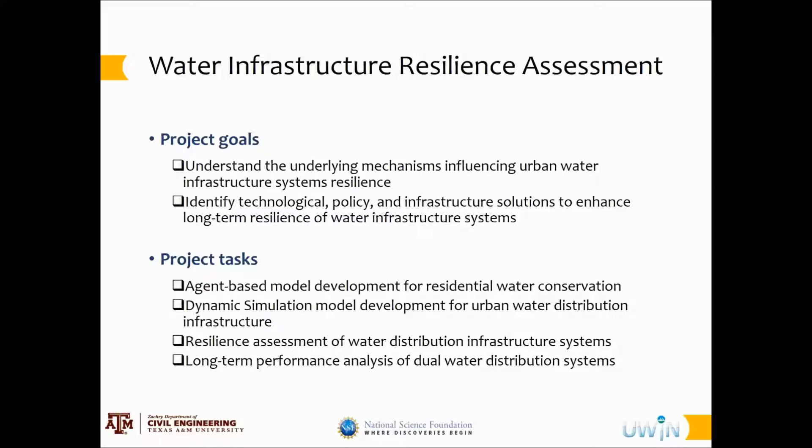So, in terms of the project tasks, we are looking into development of solutions on both the demand and supply side. On the demand side, we look into development of agent-based models to understand the behaviors of water consumers in terms of technology adoption for water conservation. And on the supply side, we look into the dynamics of infrastructure, water infrastructure resilience, especially water distribution networks, and look into their resiliency.

Just an overview of our research project: we have looked into development of an agent-based model for modeling the household behavior in terms of adoption of water conservation technologies, established a dynamic model for simulating the long-term performance of water distribution systems, and then looking into dual and singular water distribution systems, especially dual systems as an innovative infrastructure solution for improving sustainability and resiliency measures. Finally, we conduct scenario analysis to understand under what scenarios what solutions would be more robust and lead to better resilience performance.

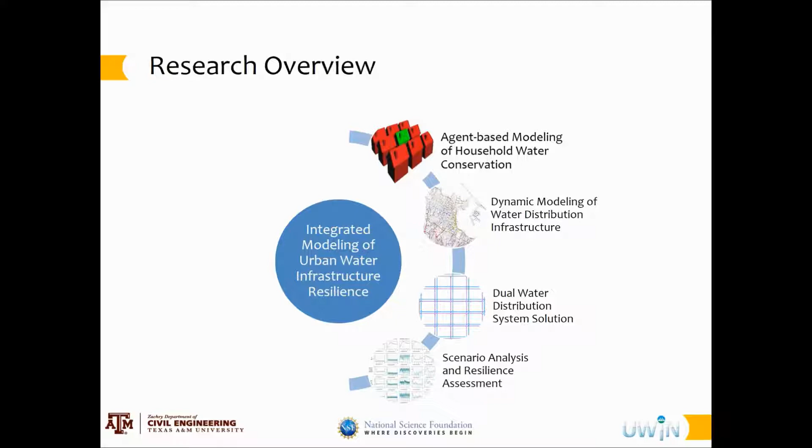So this is an overview of our research project under this thrust, but for the purpose of this webinar, I've mainly focused on the second component, which is looking at the dynamic model of water distribution infrastructure, specifically understanding the underlying mechanisms of resiliency using a complex system approach.

The motivation for this study was to understand the long-term resilience of civil systems under different stressors. As we all know, civil infrastructure, including water infrastructure, is exposed to various chronic and acute stressors, including climate change impacts, population growth and decline. In some areas, we have rapid urbanization and population growth; in others, we have shrinking cities dealing with population decline. At the same time, we deal with limitations of resources, basically disparity between the supply and demand of resources, including financial resources, and also extreme events.

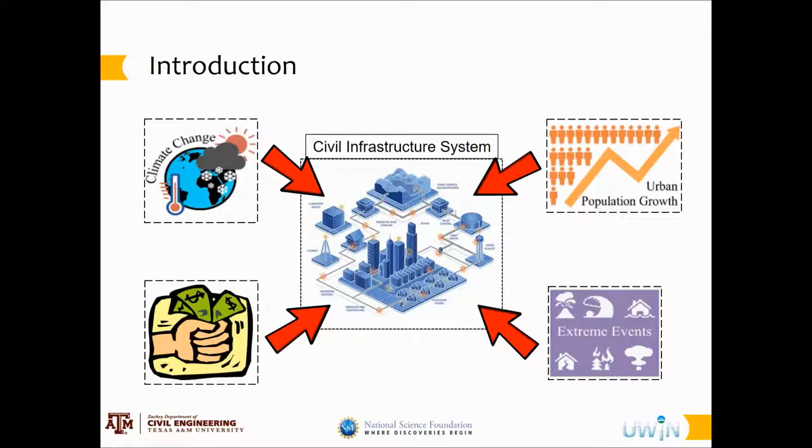To deal with these stressors, the concept of resilience emerged over the past two decades to better understand the behaviors of systems under stressors. There are two main paradigms for resilience assessment in the context of infrastructure systems. The first is an engineering-based approach, which looks into how infrastructure systems lose functionality and restore and recover from perturbations caused by stressors.

This approach is mainly used for assessment of resilience under acute stresses such as natural disasters and man-made disruptions. In this paradigm, resilience is measured based on to what extent a system loses functionality and how fast it recovers.

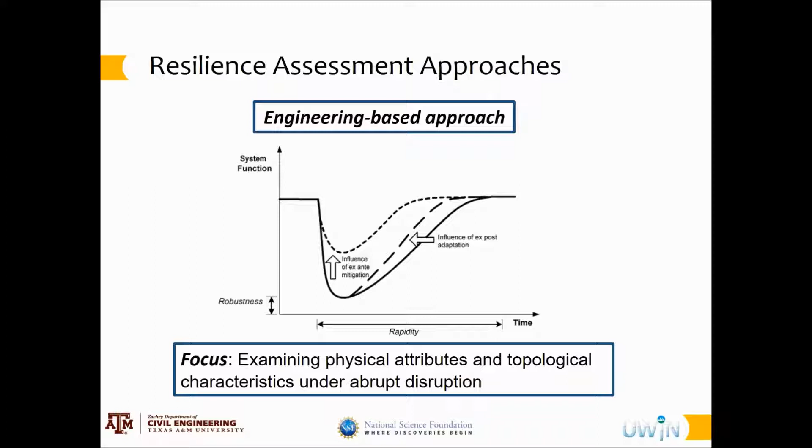It's a very powerful approach, and it's been used extensively for resilience assessment under acute stressors. There is another paradigm called the complex system approach, which takes a different view into the resiliency of infrastructure.

In this approach, the resilience of infrastructure is characterized based on the underlying socio-technical dynamics. We look into the long-term performance and behaviors of infrastructure, identifying steady states of performance and changes in these steady states under different external stressors, focusing more on chronic stressors. This allows us to characterize whether these systems have resilience performance, evaluated based on changes in the stable state of performance, which is called regime shifts.

The threshold values at which these regime shifts happen are referred to as tipping points. So basically, in a complex system approach to resiliency, we understand the existence of stable states of performance, changes in these stable states characterized as regime shifts, and also the tipping point values of stressors and system parameters that lead to these changes in the performance regime of infrastructure.

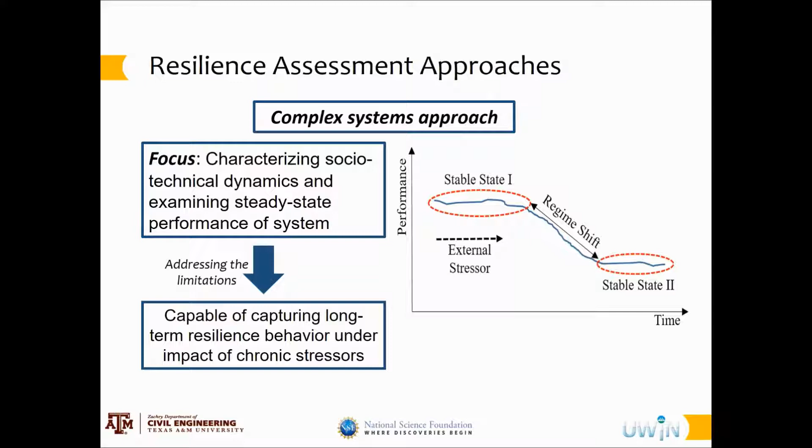This approach is very effective for long-term resilience assessment, and also for capturing important chronic stressors that urban water infrastructure deals with, such as population change, funding limitations, and climate change impacts. To do this, we established a complex system resilience framework and looked into three underlying mechanisms.

One important mechanism in this approach is identifying external stressors and how they impact the internal dynamics of infrastructure. When we look into the internal dynamics, we look into both the physical system and the human system.

We conceptualize urban water infrastructure as complex systems composed of human actors and physical networks. By looking at the interactions between these two systems, we examine how they evolve over time under these stressors, how the internal dynamics lead to certain stable states of performance, how these stable states change over time under different stressors, and whether there are regime shifts or tipping point behaviors in the system.

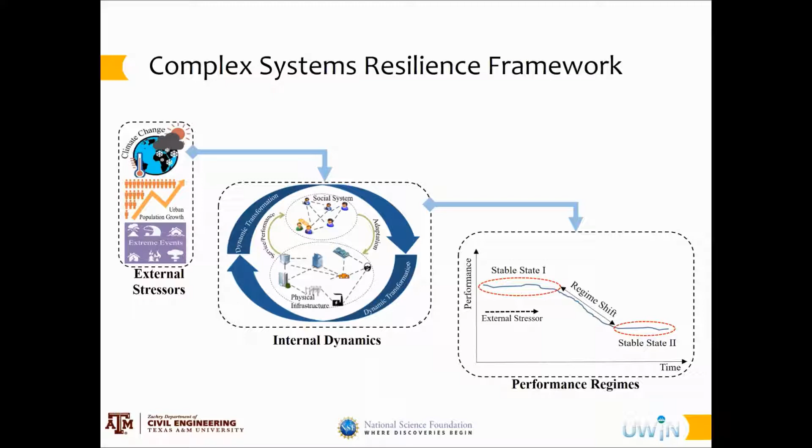Looking at the first component, external stressors, we consider both chronic and acute stressors. Chronic stressors are gradual, low-impact, and high-probability events, for example, population growth or decline.

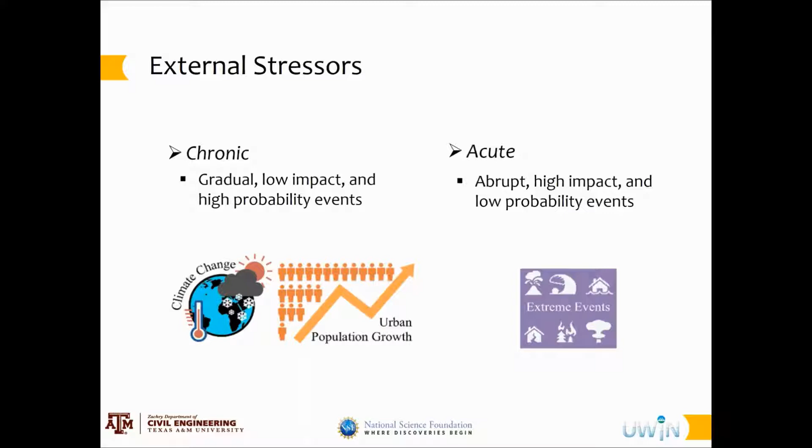In some areas, we know that population is growing, and it's almost certain, but the impact is not immediate — it builds up over time. On the other side, we have acute stressors, which are abrupt, high-impact events like natural disasters and extreme events.

In terms of internal dynamics, we look into both human actors and physical infrastructure, and how external stressors create risks and how these risks are perceived by the human actor systems. In the human actor system, we look into two types of actors: institutional actors and consumer actors.

Institutional actors are actors who manage and govern the operation of physical infrastructure, and consumers are receivers of service. Based on the decision-making processes of human and institutional actors, the physical networks are renewed, maintained, and operated, and based on the performance of physical networks, service is provided to consumers.

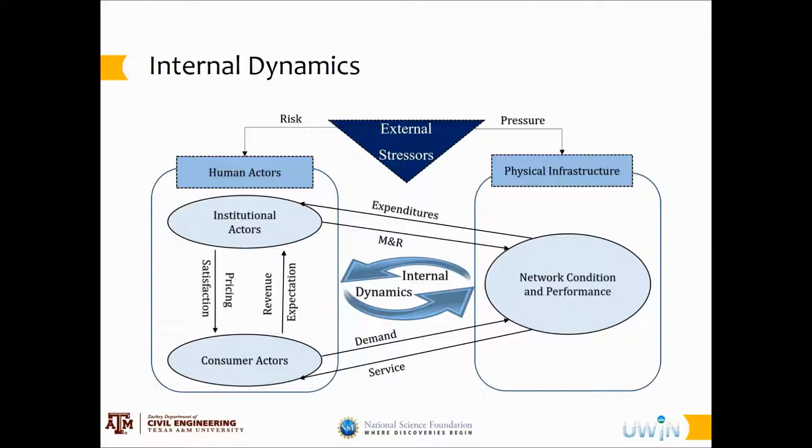Institutional actors receive funding from consumers because of the service they provide. At the same time, consumers have a demand on physical infrastructure, and physical infrastructure maintenance has an expenditure on institutional actors. This figure, to some extent, captures the internal dynamics of physical infrastructure and human actors, and how different stressors can lead to changes in these internal dynamics.

After understanding the internal dynamics in the complex system resilience approach, we look into evaluating resilience performance. Two important concepts in this assessment are regime shifts and tipping points.

Regime shifts are changes in the stable states of performance over time. This concept originated from ecological sciences, and we adopted it for better explaining the changes in the long-term performance of infrastructure for resilience examination.

The second concept is tipping point, which describes the threshold values of external stressors or values related to internal dynamics that lead to changes in the performance regime of the infrastructure system. Based on understanding regime shift and tipping point behaviors, we try to understand the long-term resilience performance of infrastructure, as I will explain in more detail when discussing our case study.

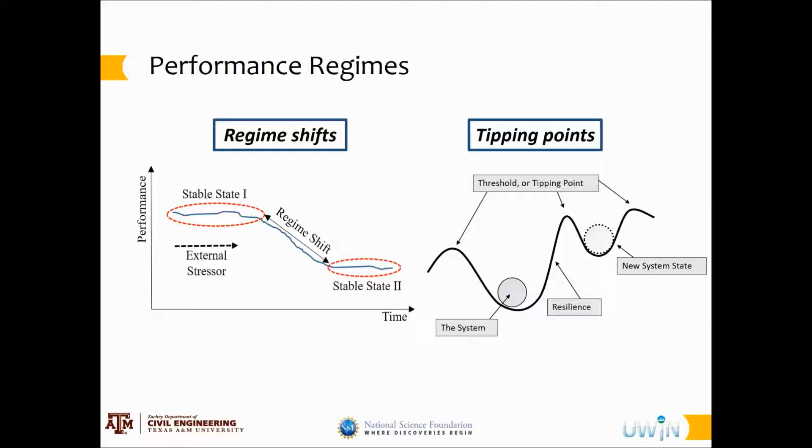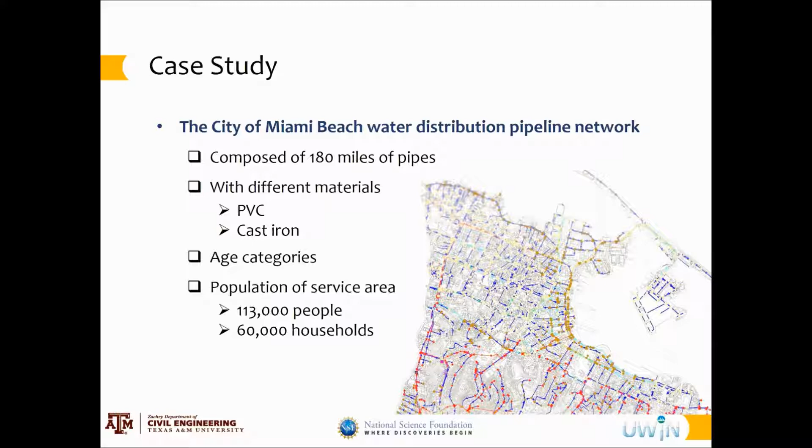So we adopted this complex system framework in a case study of City of Miami Beach water distribution pipeline, which is composed of 180 miles of pipe. The network has different types of pipes. We collected data about the length of pipes, different materials, age categories, and also the population of the service area to get a sense of the level of demand.

And other measures that we needed to implement our complex system framework. Then we used the data and the framework to implement a multi-agent simulation model. In our multi-agent simulation model, we have three classes of agents, including the pipeline network, utility agency, and water users. The main functions in each of these networks are shown on this slide. For pipe network, we are looking at the physical deterioration of the network. For the utility agency, we are looking at the renewal decision-making processes, and for water users, we are looking at the changes in population and level of demand for water.

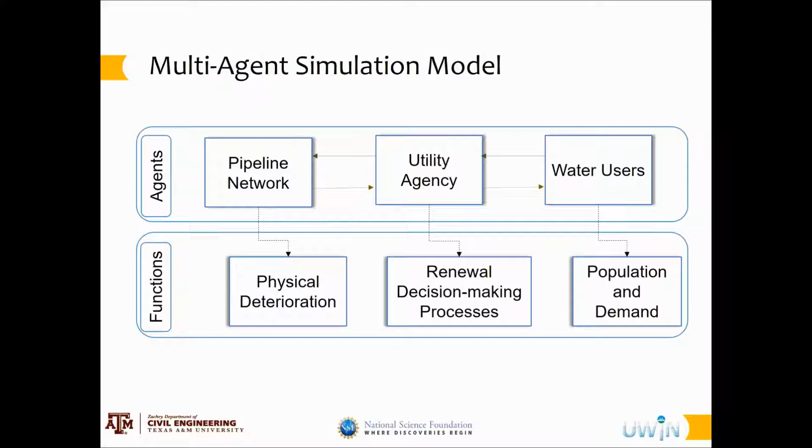Looking at the first agent, we tried to model the physical deterioration and degradation of physical networks. What we did was look into the entire network and classify the pipes into different categories, or what we call age conditions, based on the age of the network, which is a representation of the condition. So we have 5 age categories: condition group 20, 40, 60, 80, and 100, representing the age and condition of each set of pipelines. Under each age category, we determine the percentage of pipes of different materials. In this case, the two types of materials are PVC and CIP.

And as the network ages, pipes flow from one age category to the other. Another mechanism that changes the flow and degradation of the network is renewal, which is governed by the decision-making behaviors of the agency. Depending on the availability of funding and the priorities of the agency, a certain percentage of pipes get renewed each year, which brings the pipes from the highest age category to the lowest age category, which is 20.

So we use different measures for capturing the network level performance. For example, one measure is the average condition of the network, which is basically a weighted average of the age of the network based on the percentage of pipes in each age category. We also use other measures such as network breakage, water leakage, and service reliability, which is based on the percentage of time that the system is able to meet 100% of the demand.

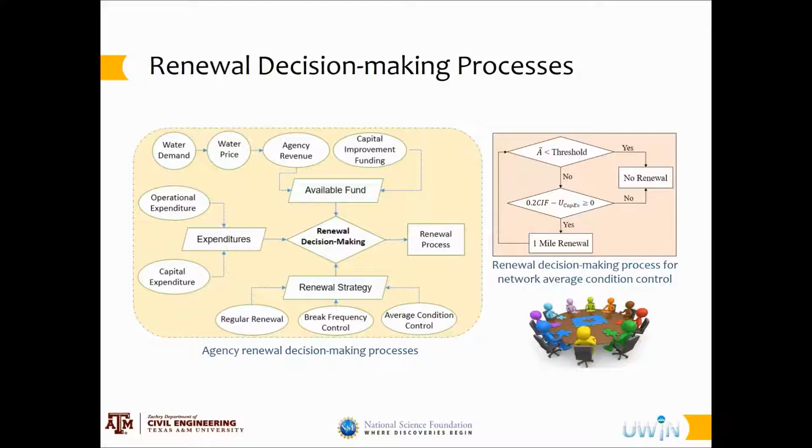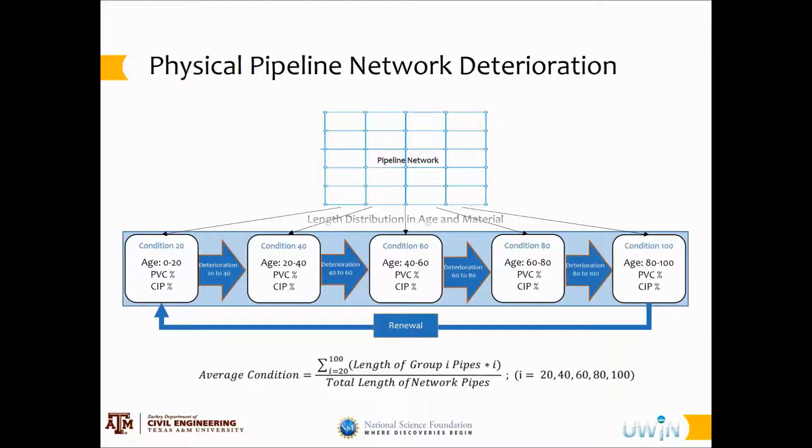So the figure on the right hand side shows the renewal decision-making process for maintaining the network average conditions. Based on the threshold that the agency defines for the target average condition and the availability of funding, a certain percentage of pipes in the network get renewed, and if funding is not available, the renewal is governed just by the availability of funding. The outcome of this decision-making process determines the renewal process shown in the previous slide, which brings the pipes from older condition to age condition 20, helping model the degradation and renewal process in the system.

At the city part, a user can define the number of households in the city, the population of the city, the population rate, which is growth or decline, and also the energy intensity of water, which is basically based on the information about the treatment processes and pumping, etc.

At the network parameter part, the characteristics of the network are defined in terms of the distribution of pipes at the beginning of the analysis into different age categories, and also the percentage of pipes in each age category for different materials. The other parameters include the average pressure, average flow rate, and average failure duration in case there is a break.

In the third component, which is agency attribute, the strategy for renewal is determined. We have three renewal strategies, as I mentioned. Then the threshold for each of those strategies are determined, and also the water price and water price hike, and possible capital improvement budgets, which are in addition to the revenue that the agency has - usually capital improvement programs that lead to major renewals and improvements in the network.

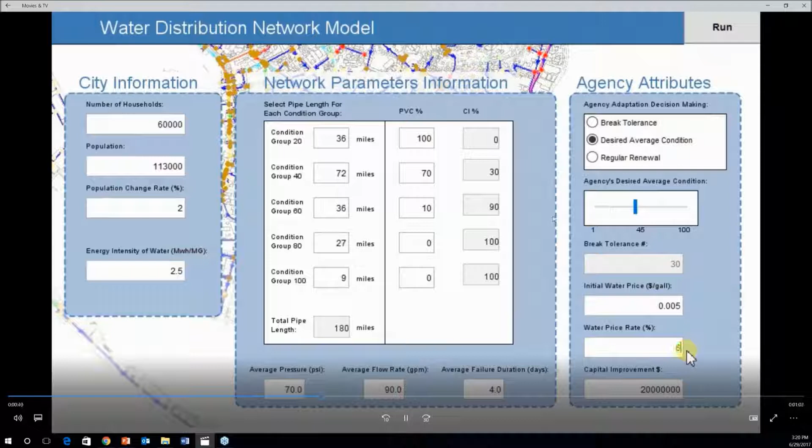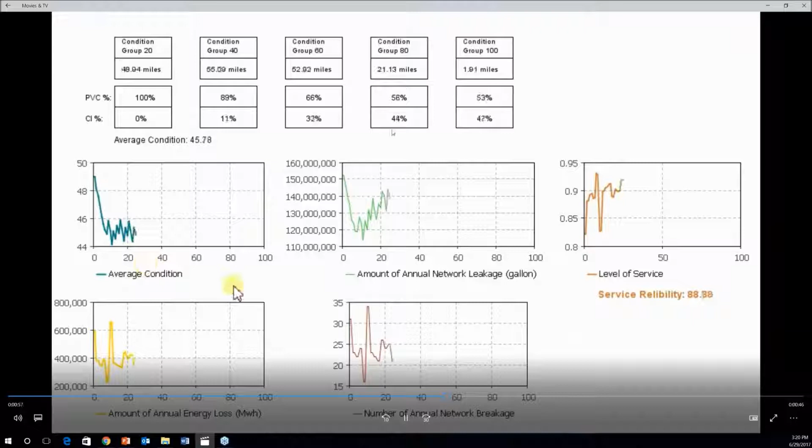So after a user defines these input parameters, they can run the model, and the user output interface appears. On the output interface, we have on the top part the different age categories and the degradation of the network, to see how different pipes move from one age category to another.

And at the bottom, we have different charts that simulate the network level average condition, amount of network leakage, annual energy loss, number of breaks, and level of service.

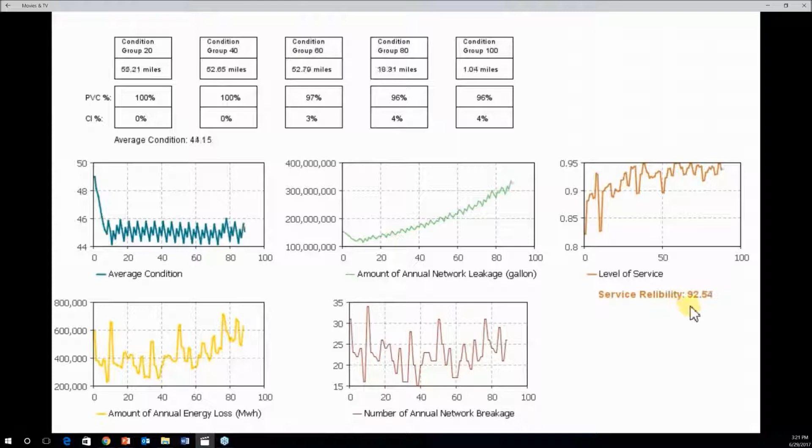In these outputs, the measures related to average condition, leakage, and energy loss are deterministic, but the one related to annual breakage is stochastic, because we use a stochastic process to simulate the breakages in the networks based on historical data of pipe breakages.

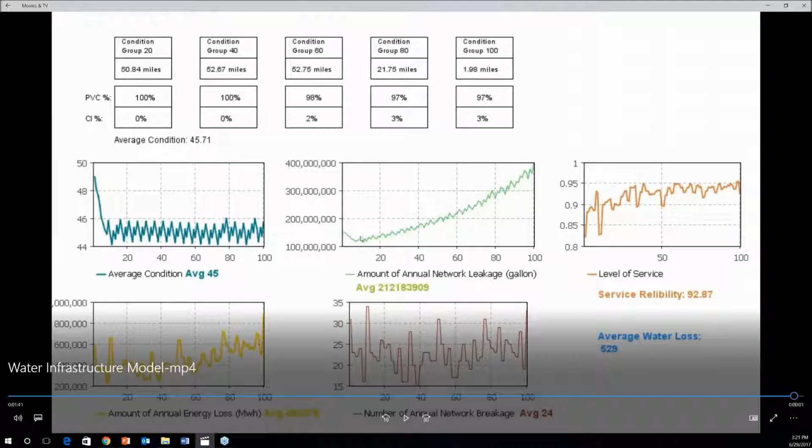We use these outputs to determine the existence of certain performance regimes and the different trends in the water system performance under different scenarios. This could be used to identify the two phenomena we are interested in: the existence of regime shifts and also the tipping point behaviors in the system.

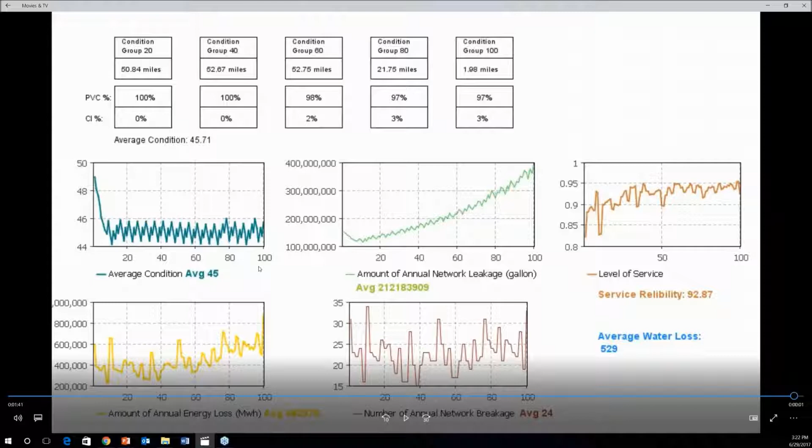We used the model for scenario analysis, but before we started that, we tested the model through different verification and validation techniques. We adopted internal verification to make sure that the logics in the model are properly built and the model creates consistent results. Then we used data and model validation to ensure the quality of the model in terms of completeness and consistency.

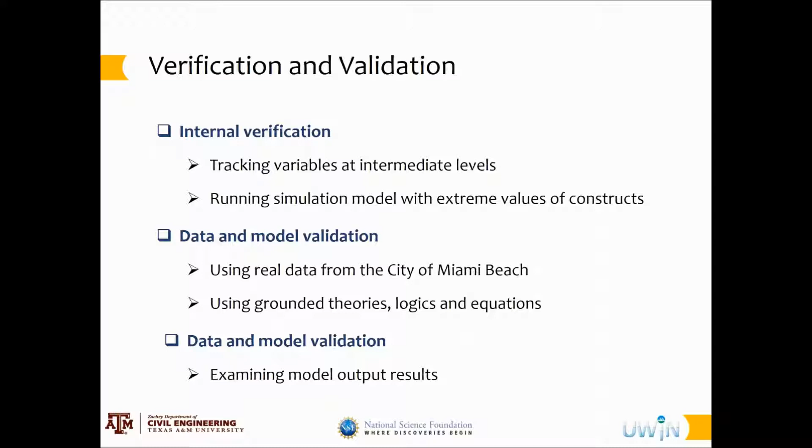Then we used other validation techniques to evaluate whether the trends and behaviors observed in the system are reliable. Accordingly, we designed our simulation experiments.

The powerful aspect of using simulation for evaluation of resilience behaviors is that we can simulate multiple scenarios. Unlike historical data, where we just have certain possibilities out of many that could happen, simulation enables us to expose the system to different conditions and stressors under different scenarios, and evaluate how these changes in external stressors and parameters of internal dynamics lead to certain behaviors.

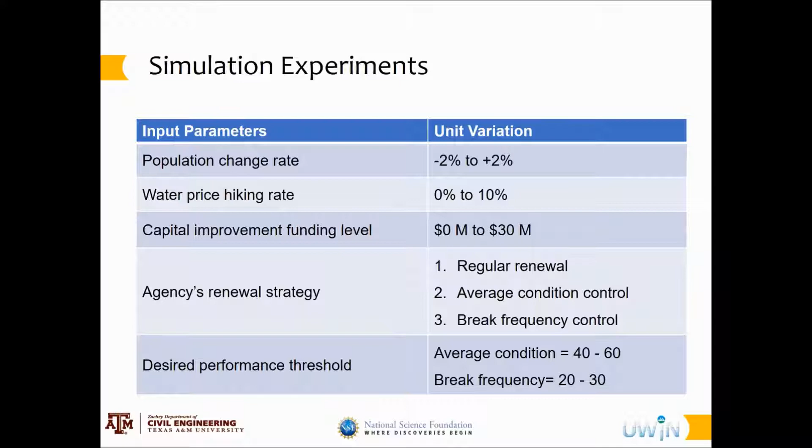As you can see in this table, we have scenarios related to different population change rates, water price changes, levels of capital improvement, agency renewal strategy, and desired performance thresholds for different strategies.

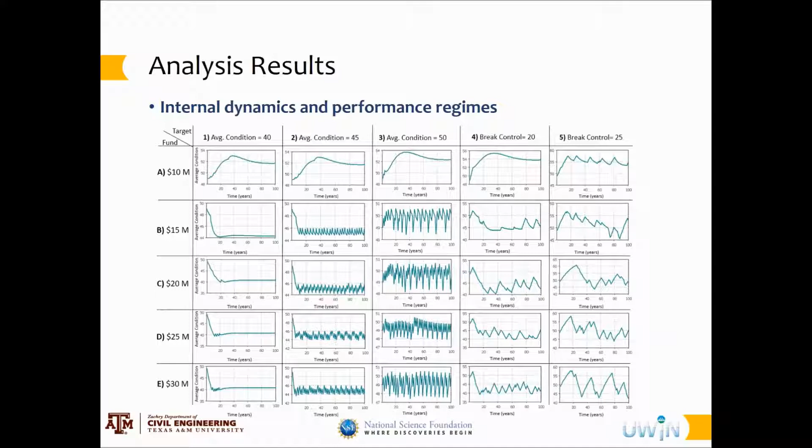But if we have more, there is no major difference. So basically, spending more on the system will significantly improve performance only up to a point. That's an interesting aspect. For each water infrastructure network, there is an emergent level of funding which is required to maintain a system at a certain performance regime, which is to have a resilient performance.

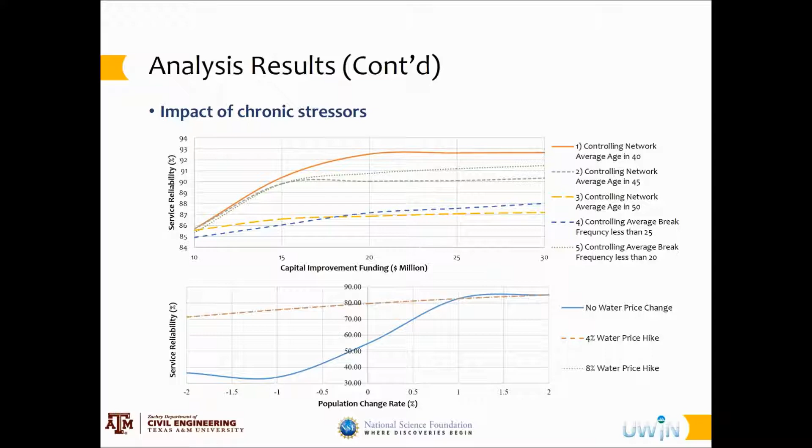That was the first part of the study, which was the establishment of the framework and development of the model. Then we realized it's not just scenario analysis—we can use the simulation to test different solution concepts. One of the solution concepts we are looking at is dual distribution systems as an innovative infrastructure solution.

So basically, they can potentially improve the performance of the network. So the question for us is whether dual systems can also improve the resilience performance of the networks over the long term under different stressors, and we use this model that I explained in the first part to do this analysis.

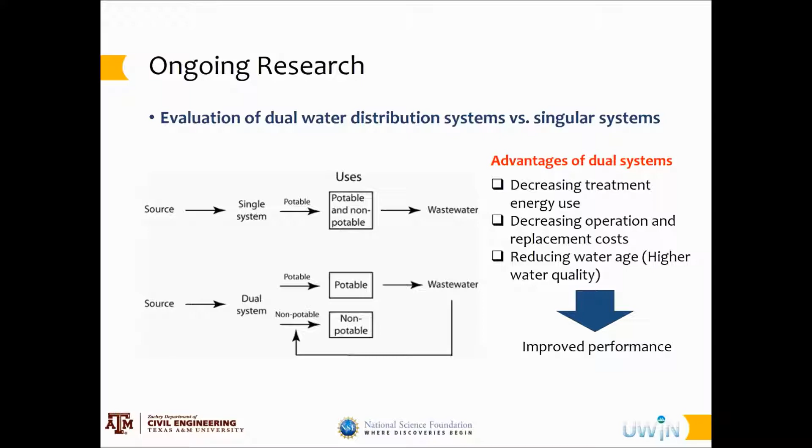This work was implemented using data related to the city of Fort Collins. We collected data related to the water distribution system there and looked at previous studies that established characteristics of dual distribution systems. We used the data to recalibrate our simulation model and make required modifications to capture the characteristics of dual systems, then conducted scenario analysis to evaluate the long-term performance of the system under each scenario, comparing dual versus singular systems to see whether dual systems perform better or worse. Our analysis is ongoing.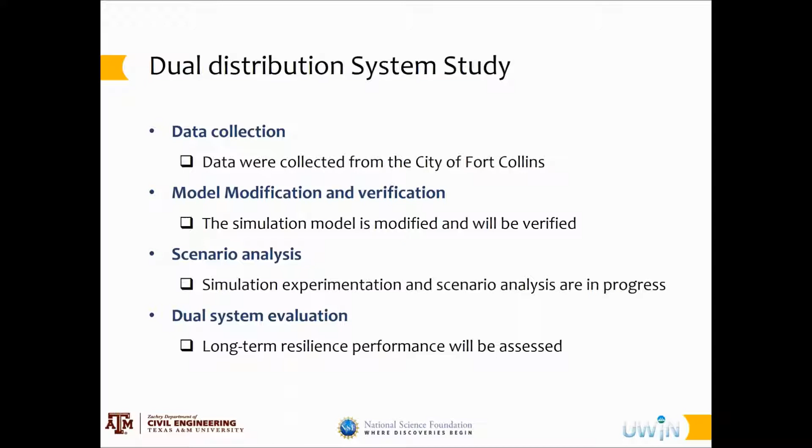Some of the preliminary results we have relate to different network performance measures. These are preliminary results we're still verifying, as it's an ongoing activity. But our preliminary observations suggest dual systems can lead to almost 50% less energy loss rate in the systems over the long term. Also, under a specific renewal strategy, say regular renewal, dual systems can have about 9 to 10% better condition over time. Looking at other measures like total breakage, we can see that total breaks per mile are less in dual systems compared to singular systems. This is promising in terms of being able to quantitatively evaluate the performance of these systems under different scenarios.

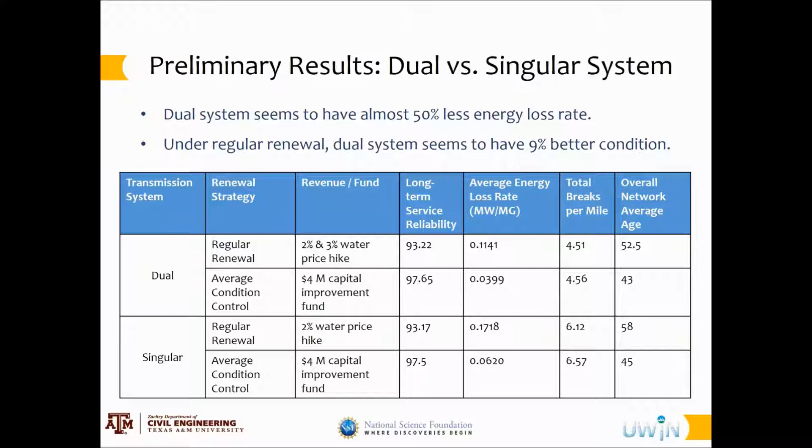Currently we are looking into scenario analysis because we believe there might not be a one-size-fits-all solution. Maybe dual systems are more appropriate for certain scenarios, and singular systems more appropriate for other sets of scenarios. So we are looking into those issues to establish under what scenarios these systems would be more resilient, and we'll report those findings hopefully in future webinars.

Just to summarize the work we've done so far: in terms of theoretical contributions, we established a complex system-based framework for resilience assessment in infrastructure, applied it in the context of water distribution infrastructure, and developed a computational model using a multi-agent simulation approach to capture the internal dynamics of infrastructure and human actor decision-making, in order to simulate long-term performance and transformation of these systems under stressors.

From a practical perspective, the findings we've come up with so far help us identify infrastructure, policy solutions, and operational strategies that could lead to better and more resilient water systems in different areas.

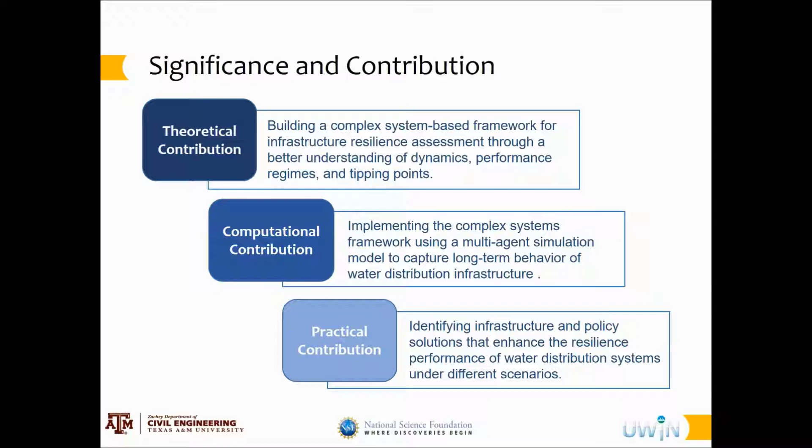In terms of next steps, we are comparing different infrastructure solutions and trying to look into different U.S. cities to see whether the characteristics of each city will affect the long-term resilience performance, and whether each set of solutions and strategies would be more specific to a particular geographic and regional setting. We want to move toward more flexible strategy development rather than a one-size-fits-all solution concept. With that, I'd like to close the presentation and answer questions.

Before that, I want to acknowledge the PhD student on this project, Kambiz Rasoulkhani. Everything that I presented was his work — I just did the presentation. So all the credit goes to Kambiz.

Okay, so I guess we need to answer the questions. Yeah, sorry, it took me a minute to unmute myself. Thank you so much to both you and Kambiz, it was a wonderful presentation.

Jen has a question. She's wondering, for your preliminary results of dual versus singular systems, how applicable are these results to other utilities? Okay, that's a great question, Jen.